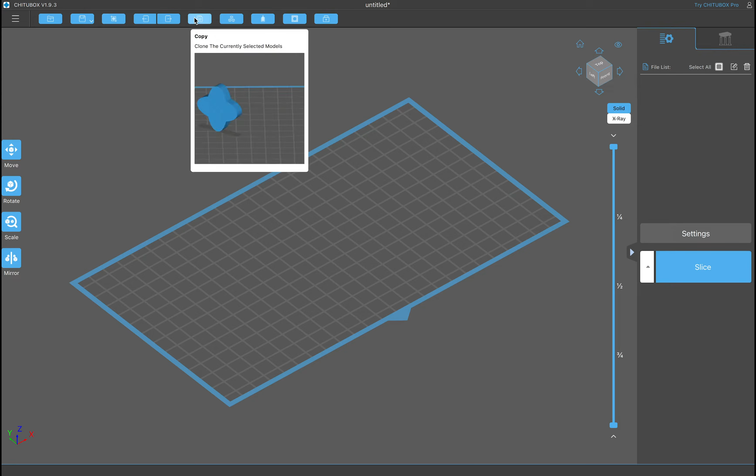Then you've got your back button and your redo button, and the rest are functionalities when you actually have some models in here. You've got copy, you've got auto layout, hollowing, and I have already done a video on hollowing, and I'll put that video right here for you. Then there is dig a hole, and that is also in that same video. And then repair.

Then on your left side, you've actually got your functionality tools for moving and altering your models. So you've got the move tool, you've got rotate, you've got scale, and you've got mirror, which is essentially a flip. The nice thing is, if you move your mouse over any icon in Chitubox and hold it, they have this nice little box that will pop up and show you exactly what it does.

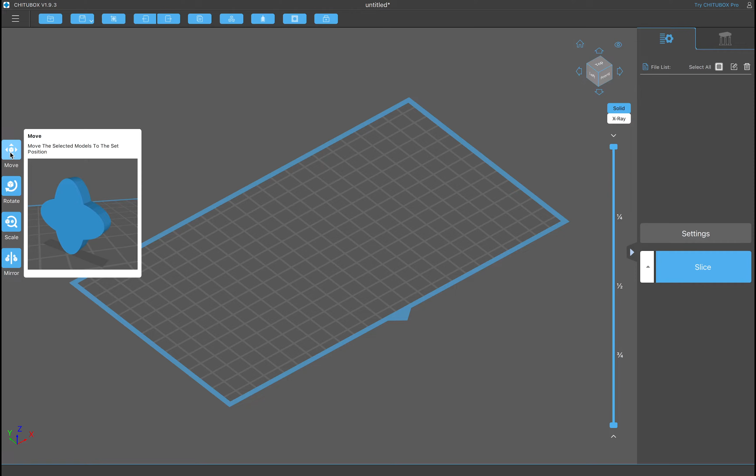So I'm going to go ahead and go to the open file and bring in my files. This is the actual model that I'm going to be using today from Chibi STL, and I'll go ahead and throw a link in the description of where you can get this model. The great thing is, if you actually sign up for Chibi STL, this is part of the welcome package, so you will automatically get it if you sign up for his Patreon.

So once you bring them in, it does this cool little animation drop for you. If you looked at the image of what this model is, it actually had measurements and it showed you how big this thing was. So I am not going to be printing this full size, and honestly, Chibi STL and 3DXM, which is the same artist, he always makes his models pretty massive, but I'm always scaling them down.

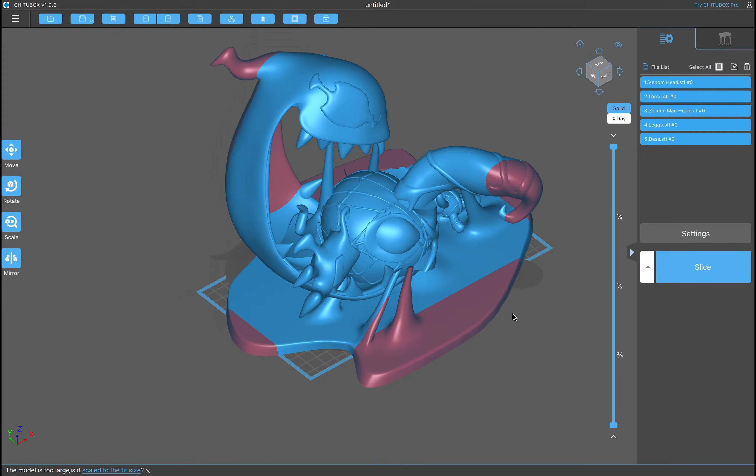But before we get into that, being able to move around in Chitubox is really important. So the main functions that you need to know to move around here is your scroll wheel on your mouse will actually zoom you in and out, and that is a very useful one. And if you have a laptop, that's just usually, at least for me on a Mac, it's 2 fingers in and out, sliding up and down.

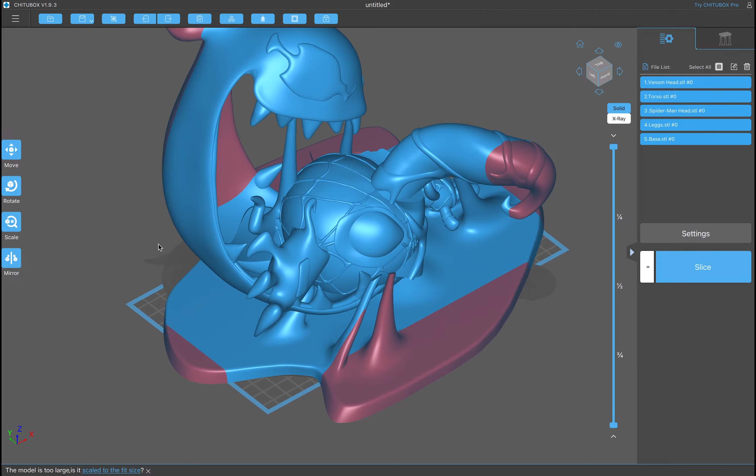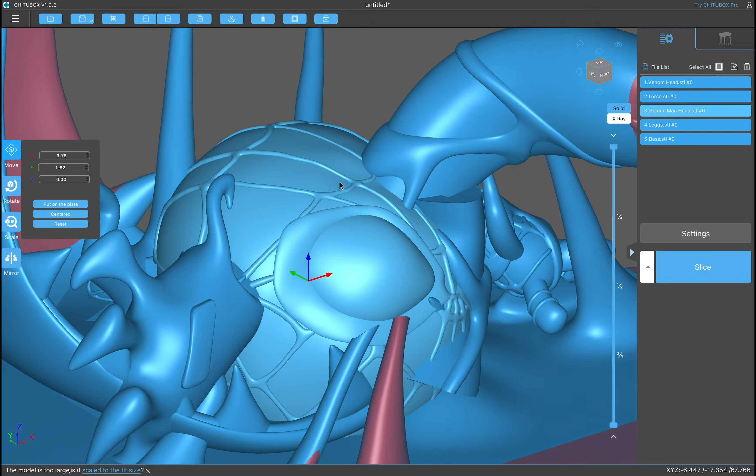Now, the other thing is your pan, and all you do is click with your left mouse click button, click and drag, and that will pan around so you can move around your object. The same thing if you're on a laptop, that's just a regular single click, and you can move that around. Now the other thing is your spin, so that is just a right click. I'm right clicking, holding that down and dragging around, and this allows me to spin my model around. So in the combination of zooming in, spinning around, and panning, those are the main things you need to know to be able to get around in Chitubox.

So the first thing I'm going to do is I am going to scale all of this. I'm going to see right here that everything is selected, hit scale, and then scale to fit. And that will automatically scale my entire model to fit my build plate.

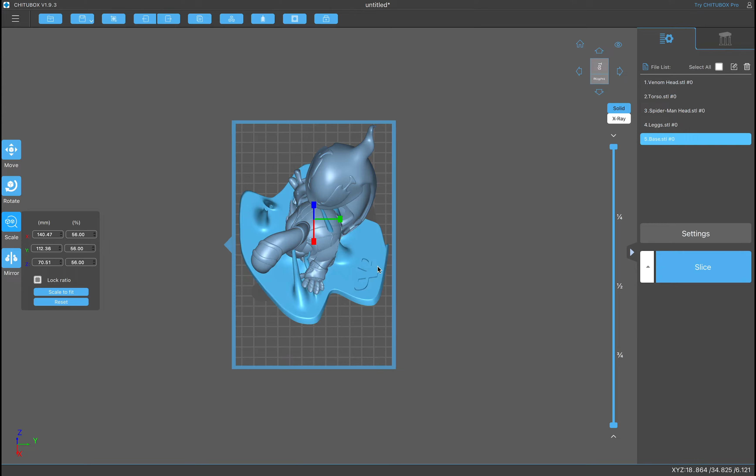So the one thing I do know, I am going to scale this down to 56%. So now everything is at 56 because I have lock ratio aspect and everything is selected over here where it says select all. Now I can uncheck this and only click one thing at a time and scale these one at a time, because when your models are unselected, they are gray. When they are selected, they are blue.

So now what I'm going to do is click right here on the auto layout, and this is just to easily separate everything so I'm not just clicking and dragging. Then I'm going to click on the center. And there we go. So now I have everything moved away from each other, and how I'm going to do this is actually going to be two separate prints.

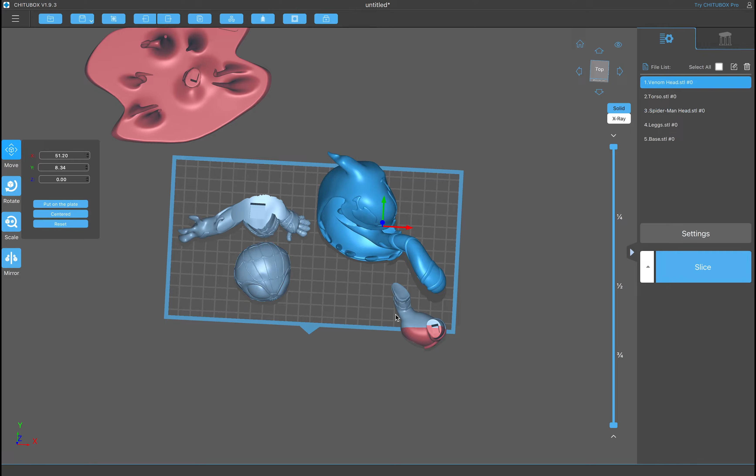I'm going to print the base in one print, and then I'm going to print Venom and Spider-Man in another print. So this will be one, and then this will be another.

The nice thing about Chitubox is when it is out of your area of printing, it will actually turn red. So if you see that this blue box, like if I did this right now, it would literally just print this right to the edge. And you don't want to do that.

You really just want to use the red to identify that something is out or if it's in. If just the tips of these fingers were red, I would know that I would have to bring this in. And I'm not painting his nails, it's just out of bounds, so it wouldn't print. So doing something like that would bring me right back into the printing boundaries, and this would print wonderfully.

So the next thing I need to do is hollow my models. I'm going to quickly go through this because I've already made the video explaining how I hollow my models.

So I'm going to click all of these and hollow them all at once. So I click on the top one, hold shift, and then click on the bottom one. Then I just go over here to hollow and start.

Then once that process is complete, I just double check, and I take my slider bar over here on the right hand side and drag that down to see if it actually hollowed.

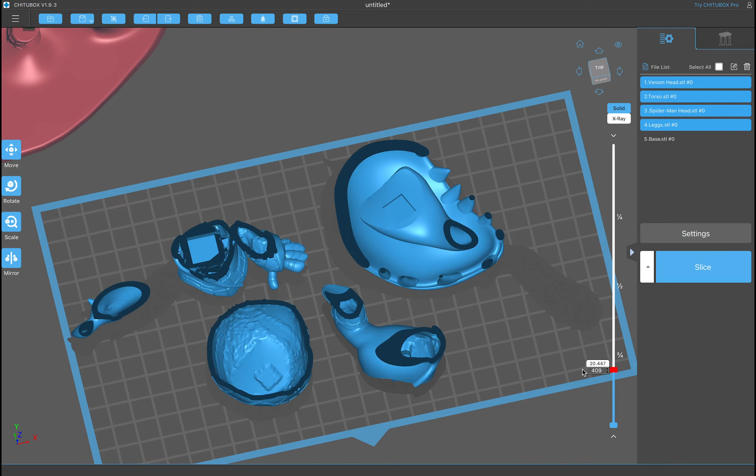So now I'm going to dig out my holes, and this is just to make sure that I get a good amount of drainage.

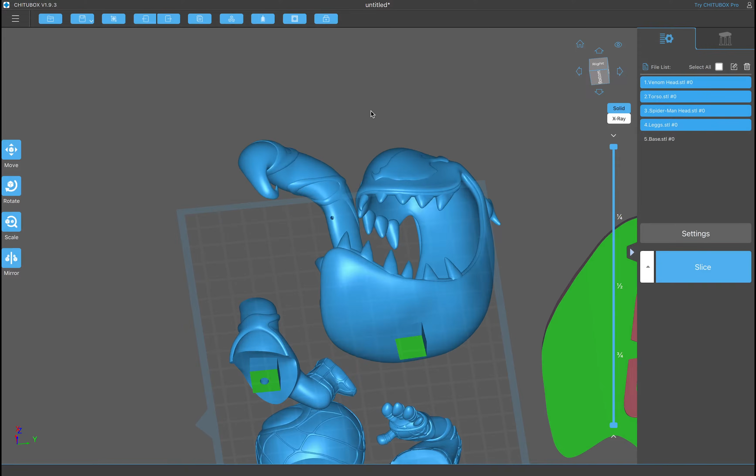So the other thing is for this tongue, I'm going to bring my size down, and I'm going to put it in some areas that are low visibility, and also places that will be easy to sand.

I think the other side, it'll be a lot easier if maybe I just put one here right in the side, and I can always putty that up and plug it up easily. And there we go. So now I have everything that needs to have a hole with a hole.

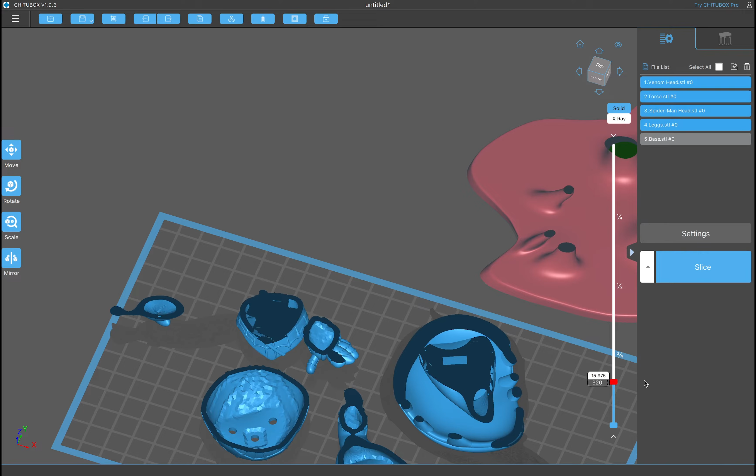That way we can clean out the insides of our model and we don't have any uncured resin on the inside of it. Once we get to this point, we are ready to start supporting our models.

Now, if you've noticed, we've been on this tab the entire time. So before we click on our support tab, we're going to click a model. So we're going to start with our legs.

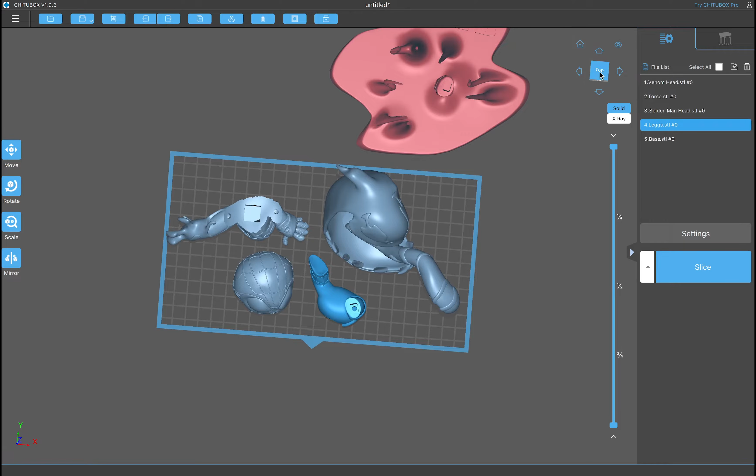And a couple things to note before you actually start jumping over to the support tab. You want to look at how it's positioned. And if we click on our top view right here, it will jump us directly to the top view.

Now you can click these arrows to jump to the different sides. So I can go to front, I can go to left, and you just keep doing that. And if you're on the top or bottom, the arrows will actually rotate it for you.

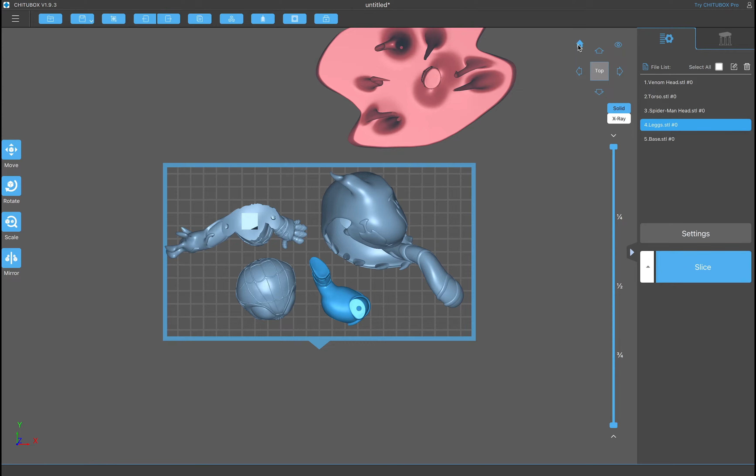So we're going to stay on the top. The other thing is if you actually lose your positioning or something like that, or maybe it's just way off, you can click your home button and that will bring you back to this view.

So let's go to our top, and then if you click this eyeball, this is actually perspective, and I recommend keeping perspective turned off because you can see how it looks like it actually passes your build plate when you're looking at it from the top.

But when you click this, this is without perspective, and you can see that it is fitting within your build plate.

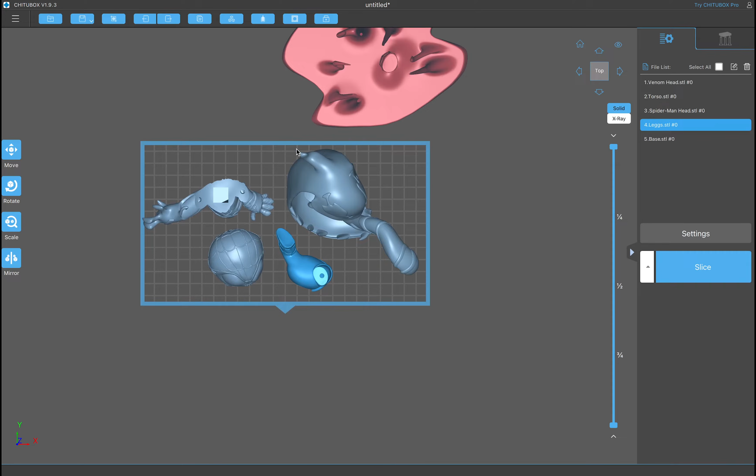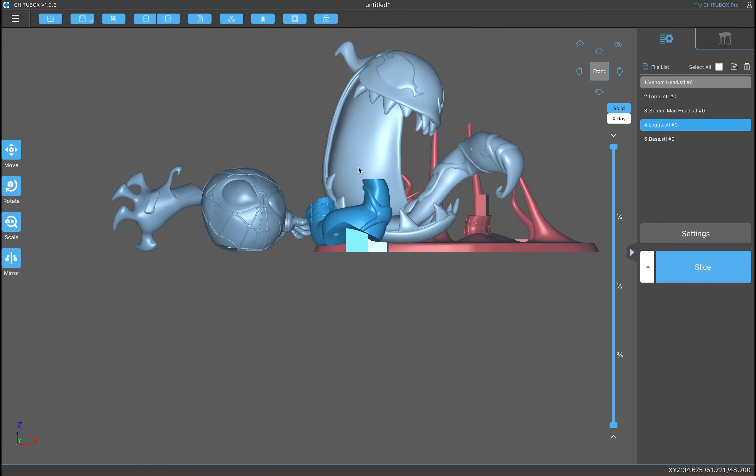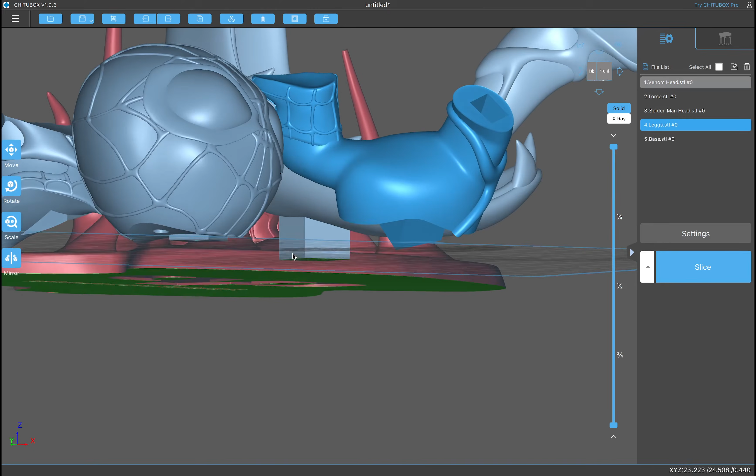So now to come to the legs, we're going to go to our front view, and we don't want this to just be flat. We want to angle it. So I'm going to click on my rotate tool and rotate this, because we don't want any flat edges, or we'd have to put a ton of supports here. We want it angled. I've angled this, but I'm going to angle it even more because I'm looking at this knee—I want it pointing up, not a flat surface. It has a bit of a round, but I want more of a round, so I'll angle it up to where that leg has a nice slope.

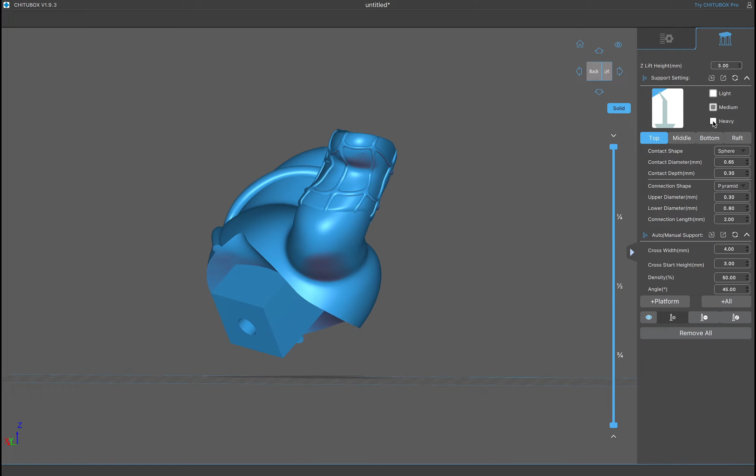So that's kind of how I'm going to do him. Here he is. When you jump over to your support tab, you can see it automatically lifts it off the build plate for me to add supports—that's your Z lift height. I go between 3 and 5. You don't want it super close, so 3 is usually the minimum I go. Then you can change between medium or heavy supports.

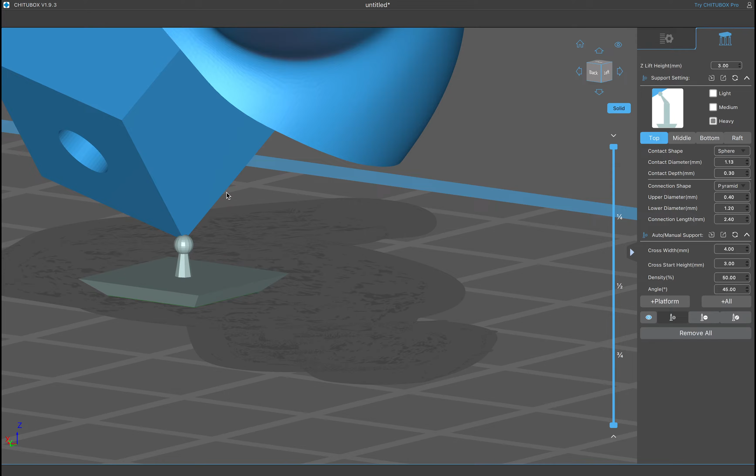So when it comes to my first supports, I always go with heavy. I'm going to click heavy, then click right on the bottom corner so it prints right on the corner. I'm not worried about the edges because this is a connection point and I'm just going to sand that down. So I'll go ahead and put a couple heavies on each edge—one here, one here, same thing here and here, move over, here, here, and one over on this corner because it has an overhang.

So now I have this very well supported, and the reason I use heavies first is because I want a really strong connection here, since this is going to hold the majority of the weight of your model—remember, this is hanging upside down. So I want a very strong connection when it first starts.

And the other part is when there's islands. What an island is—let's bring this down and I'll show you. An island is when it's printing out in the middle of nowhere with nothing attached to it. So you can see right here, these have two islands right here—one here and one here.

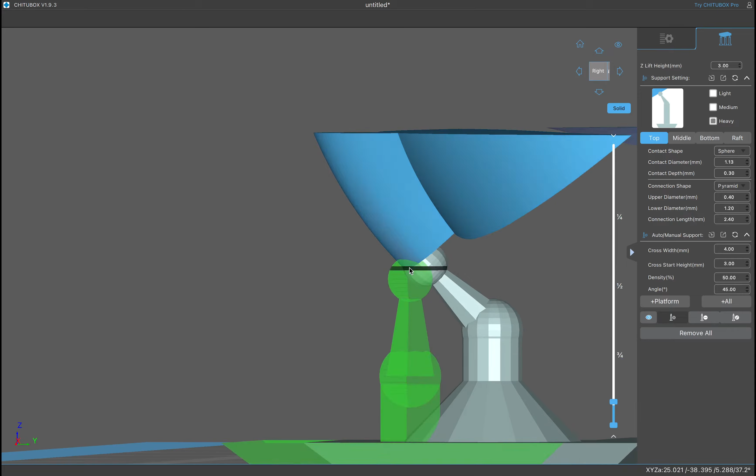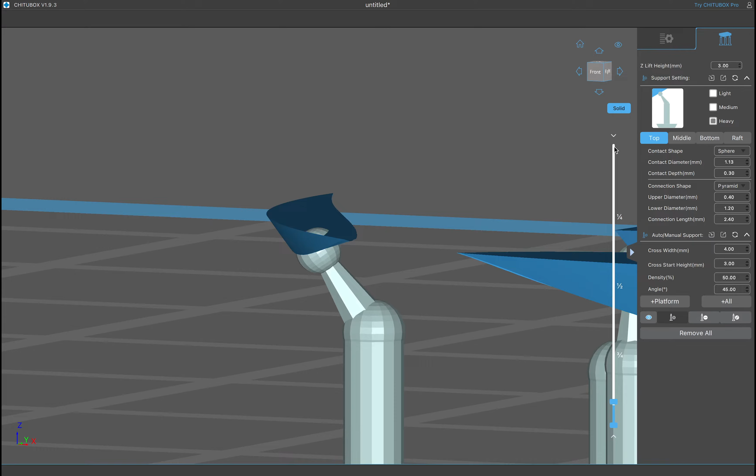So I'm going to support it at a heavy right at the bottom of this, and I'm going to try to do it so it's not interacting too much with the model. That way I can take it off and sand it off really easily. And then the same thing with this piece over here. The way you can check it is you just bring it down.

What you want is your support touching the actual model in the very first few layers, and you can see it's connected really well. Moving up, it's just going to get more and more. Now with something like this, I'm going to switch to some lights, go underneath it, and do the same thing along the edge. Then I'll move over and do the same thing on this one.

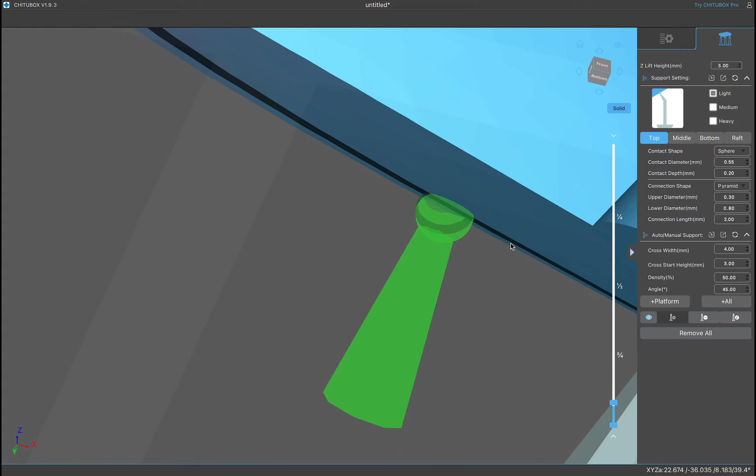Now you might be wondering why I'm not putting supports right here. It's because the more supports you put on the outside of your model, the more sanding and cleanup you're going to have to do. So doing this minimizes the cleanup and ensures a nicer, cleaner print.

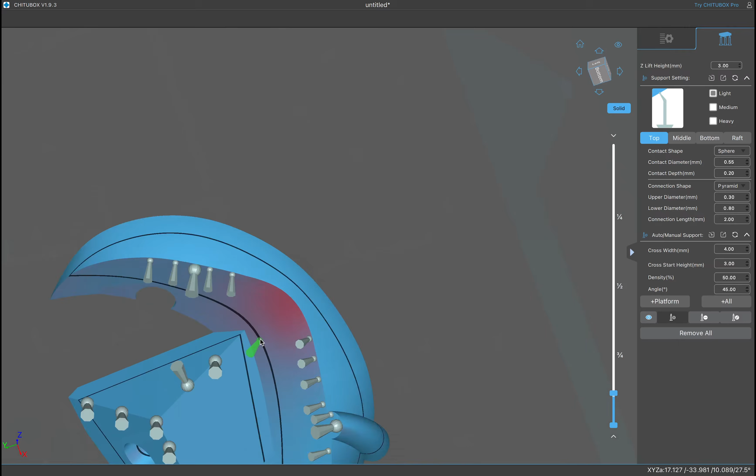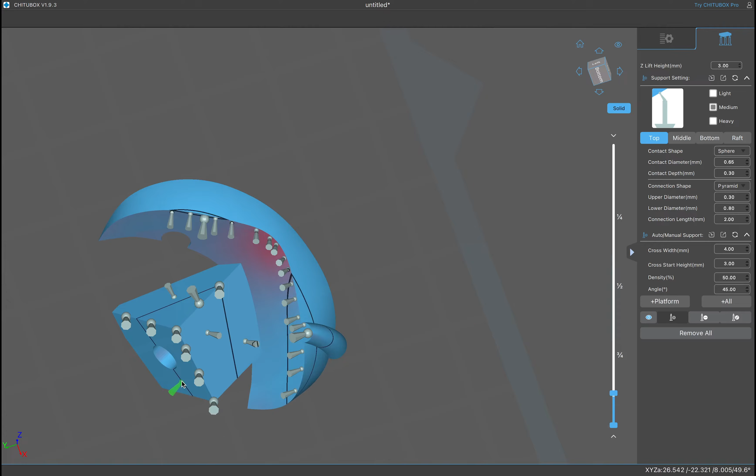So then I just move this back up, and I'm also going to keep doing this along the edge and right where these contacts are, because it's going to be very thin when it starts to connect. Then I'm going to take some mediums just to give a little bit of an overkill. I'm going to put just a couple on the faces of this model.

I'm going to put a couple on the faces right where the pegs are. Then all I'm going to do is keep sliding up to see if I see any more islands. And there are no more islands on this model, which is a great thing. But you can see the red is denoting your overhang, to where it probably needs some type of supports.

So this is when I switch over to my lights, and I'm just going to put a couple right here to help with this overhang. Then I'm going to move over here and do the same thing. I'm just going to put one here, and I'll put one right here. So there you go.

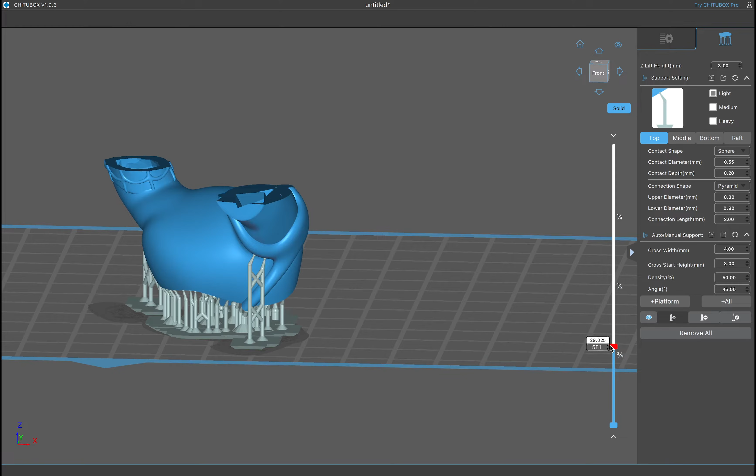So then I'm going to just keep going up, and everything should be fine with that. Now right here, there's a little bit, so I'm going to put just one right here and one right here. Now the one thing is once these start to get taller, I never do just one. Because if I did this, I've got this one pillar going all the way up. It could be wobbly, go back and forth, so you have to make sure all of your supports are nice and strong.

So you could, if you just want one support right here, you could just click on a support and support your actual supports. So actually this would be perfectly fine too. So I'm going to go ahead and just leave it like that.

Now this one is all the way done, so when I'm done with that, I just click back over here to my settings, and it will bring me to all of my models. Now an important thing to note, once it's supported, you can still move this around and move it on your build plate. You can even rotate it to make it fit good. So if you're arranging a lot of models at once, you can spin them around.

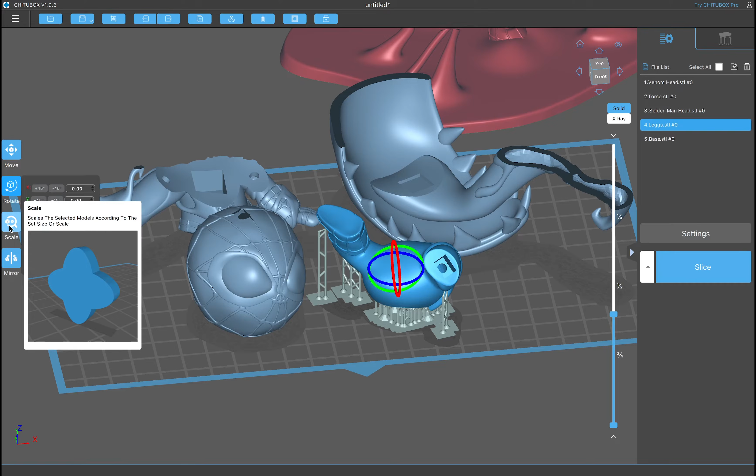But the one thing you can't do is scale it, because it will say this: it's going to delete your supports. So do you want to delete your supports and scale it, or do you not want to? So I do not want to. Make sure that you have all of your scaling right and your positioning with the rotation in the proper way before you support, because you will lose all of your supports.

So now I'm just going to go ahead and start to go through this, and if there's anything to note, I'll stop and explain it, but let's just speed through this and I'm going to support everything.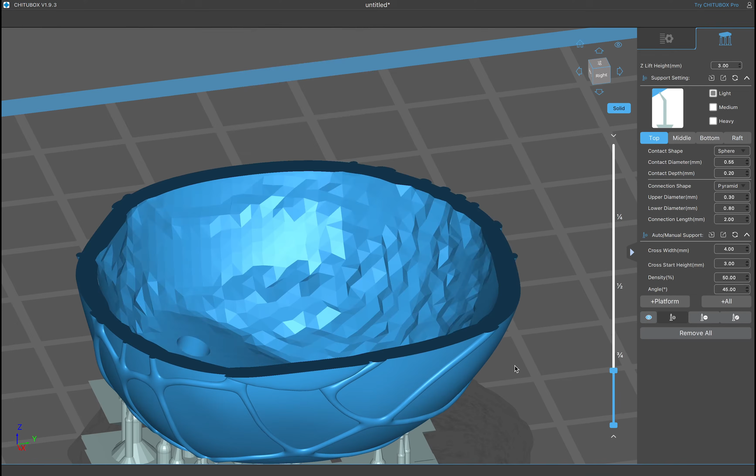So I have the head done. Now I'm going to do the torso. First I'm going to move this away just so I can see it a lot better. And you got to just kind of look at your model and see what is the best way to position this. So I am going to probably move this up like this.

That way it's printing up and everything is up at an angle, especially with these fingers. I'm going to have to support this and this little thing right here, but all of the fingers should be able to go without supports. So you can see how the tip of this finger right here is going to need it.

But I can always rotate it as well a little more. Bring that up. So no matter what I do, I'm going to have to do that. So I'm going to not make it as harsh now, because I know I have to support it, so at least I don't have to support these two fingers.

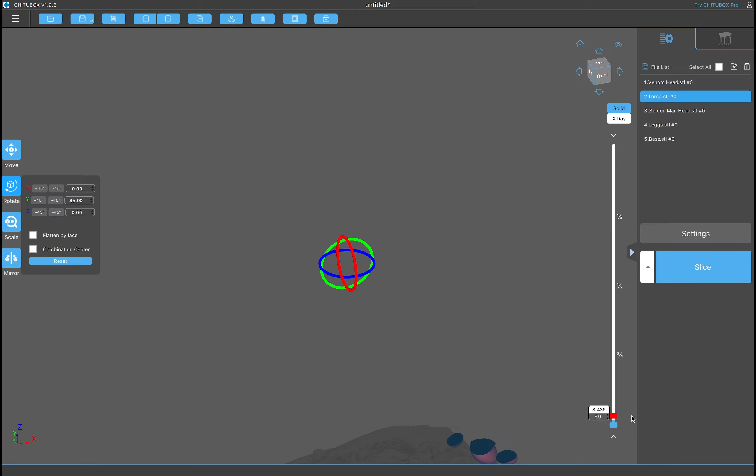And those two print just fine. So then bringing it back down through, I know I'm going to have to support every finger and thumb, and that is perfectly fine because they're nice and smooth and I'll be able to sand these really well.

So now all I'm going to do is move this back over here and jump to my supports and get started on that. And it's the exact same process.

I'm going to go in here and get my heavy supports and put one right at the tip of each finger. Then I'm going to take my light supports and work on any of these small little islands. So you can see here in the hand, there are a couple little islands here that I'm going to have to support.

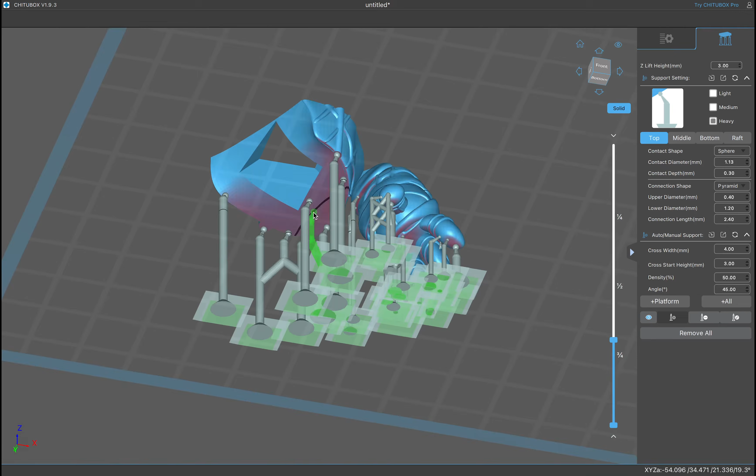The arm right here where it actually comes all the way out before it connects, it's going to need some type of support because that comes out way too far. So what I'm going to do is take some mediums and put it right out here where it has the most stress on the model, and just put a couple of them right here. Then I'm going to go into my lights and just kind of keep supporting that along the way so it's a nice strong structure.

But the thing I'm doing is making sure that they're connected. So you can see this connection bridge right here. I want them close enough to where it's going to be a really nice strong support. That way this is going to give it enough structure to keep that weight when it's pulling off of the FEP.

Another thing here, if you see the fingertip right here, it doesn't make a very big piece before it connects, and then it's actually a part of the whole hand. So there are times where I am not going to use a heavy because it's not necessary, because I don't need to hold a lot of weight. So what I'll do is use a medium support, click it right at the tip here, and then just put a light right here.

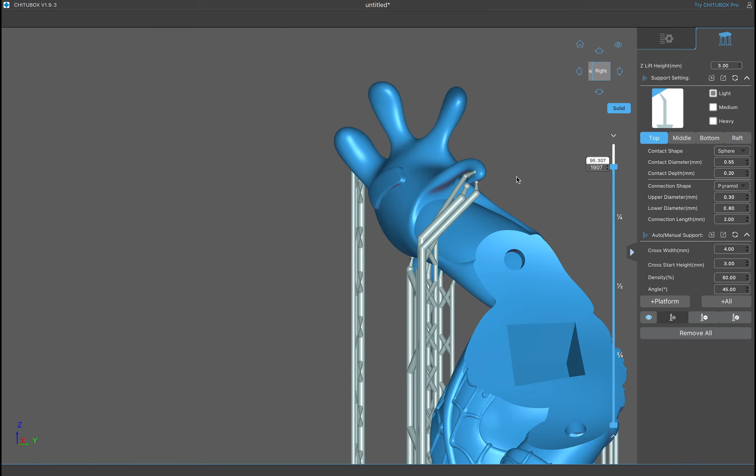And there we go. Now we have the torso fully supported. So the last thing we have is the Venom head. First, I'll kind of look at it, make sure I got the right angle. I don't want this to be sitting flat, so what I'm going to do

is click the rotate button, and then I'm going to rotate it back a little bit, and then to the side, to the back right there. That way it's just on the point, so you can see how it would be printing.

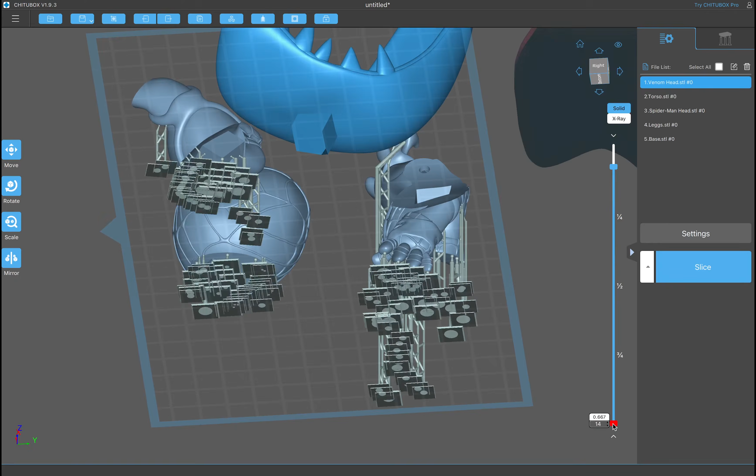And just by checking my model like that, I could see that this actually needs a hole right here. And there we go. So just like all the rest, I'm going to go ahead and support it. But you can see that these teeth are going to be a challenge. So I'm going to go ahead, ignore that for right now, and come all the way to the bottom and just focus on one little bit at a time.

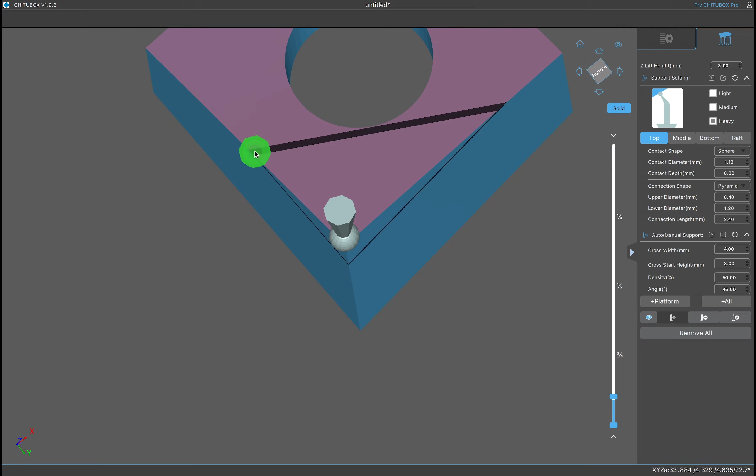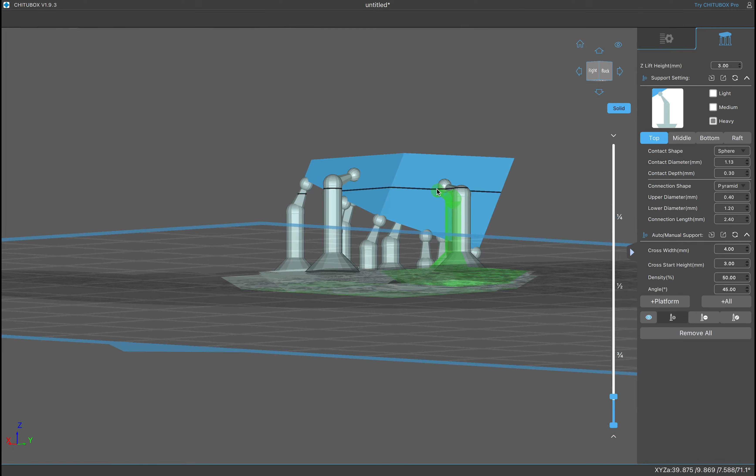So I'm going to add a heavy around the edges. And this is a big area, so I want to make sure I have enough of a connection and it's strong enough to hold this big surface area.

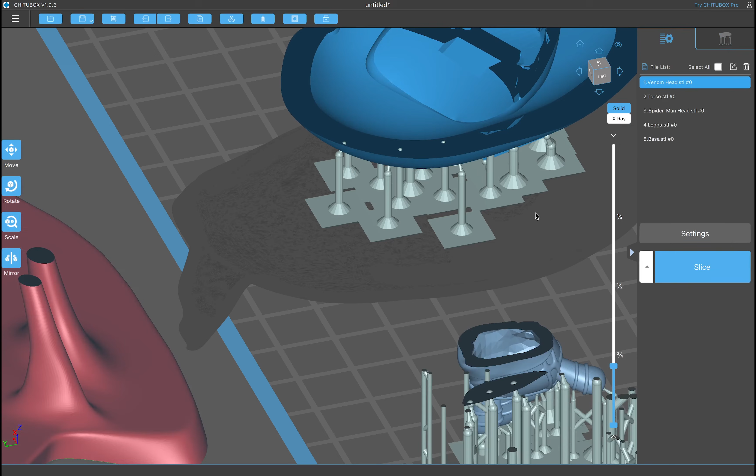So this is one thing that I do to prevent layer lines at the very bottom of my models. Now, what I first have to do is really look at the amount. So let's switch over to support and show you.

So this is a large surface area, so it is going to be having a lot of suction, because you can see here that it's actually printing all of this. So this is going to have a lot of suction when it pulls off, and that is where you can have the actual risk of getting lines in your model or even breaking supports.

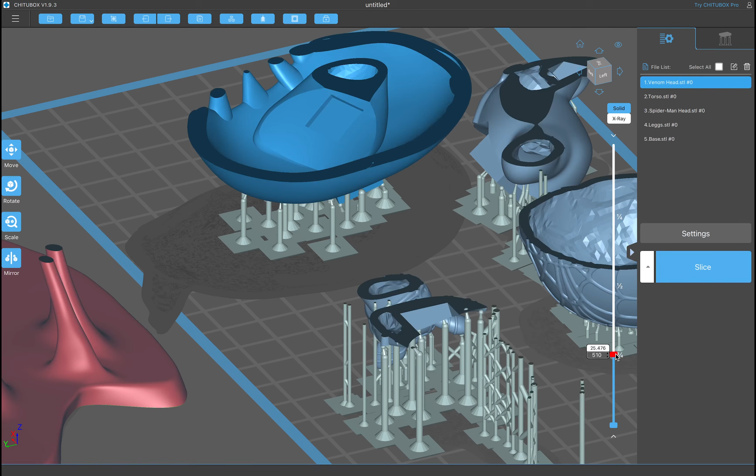So what I'm going to go ahead and do is actually just add a hole straight through my model. Now I can also be a little smart about this, because I know that there are certain areas that Spider-Man is going to be covering. So his head is going to be setting right here.

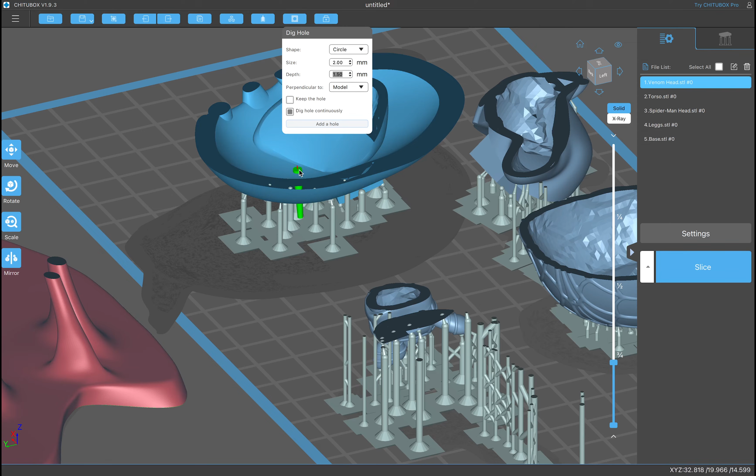So I'm going to go ahead and add a smaller hole, not that big, straight through the model. And I might have to make my depth a lot more. So there we go, now I got a hole right there, and that will actually relieve a lot of that surface tension.

But now I'm going to go ahead with some lights and just come through and add sporadically, and this is just to help with the supports.

And then out here I'm going to add just a couple heavies, because I just want this thing to not move whatsoever. And this is something you pick up over time, how much you should really be adding, because sometimes you can get away with just a little bit.

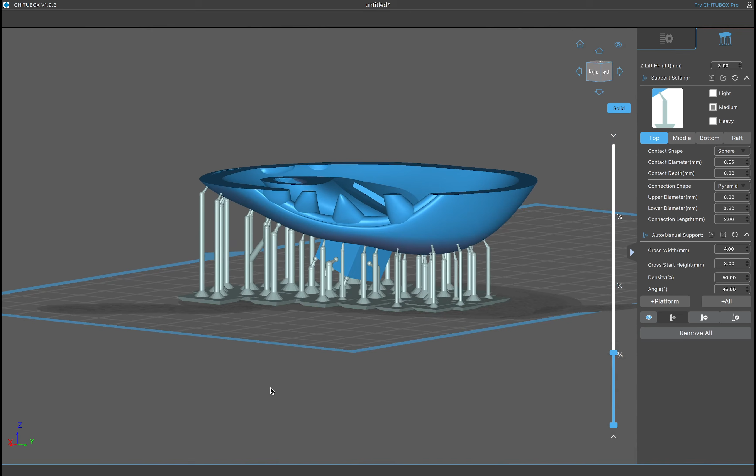And this might seem like a lot, but it's still a pretty light amount of supports for this model. But we're using a combination of heavy supports, medium supports, and light supports.

So now everything is good until I start getting to the curve of the tongue, and I'm going to go ahead and just put a heavy support right there, and then light support surrounding it.

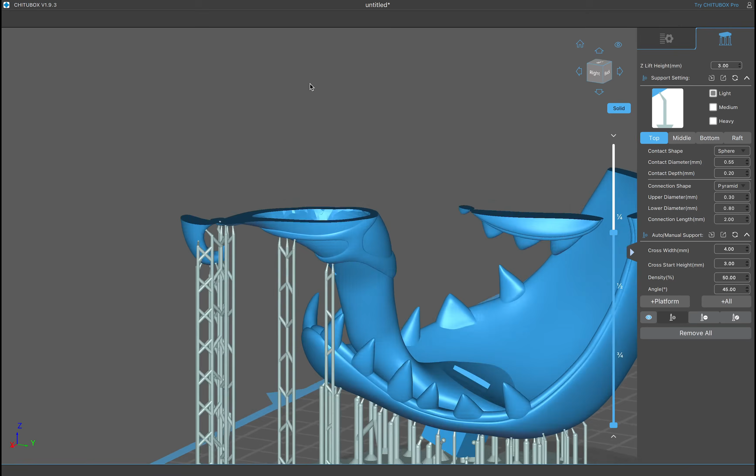Okay, so now the tongue is all done. Now it's time to move on to these teeth. And I'm not going to mess around, I am just going to put a heavy support at each one. But this is the thing, I'm going to actually bring this up just so I'm only going to be seeing these teeth.

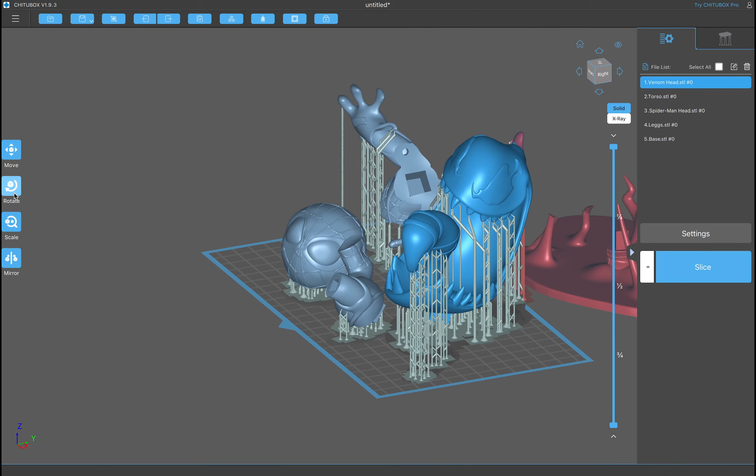Okay, so now we have Venom all supported. Jumping back, I'm going to go to the top view, and I'm going to see here that he is actually off the build plate. I'm going to just move him around.

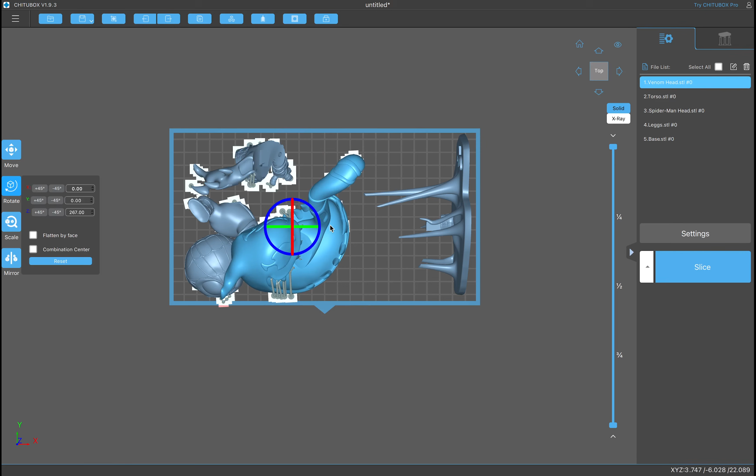And now I'm wondering if I can actually fit everything on the build plate. I'd have to print this at a pretty harsh angle, but I could support it enough.

Alright, so I am going to attempt to print all of this on one build plate. So I'm going to go ahead and start slicing this guy. Now, when it comes to the angles going up this way, I'm not too concerned. It's really anything coming down, that's where I'm going to have my islands.

So first I'm going to go ahead and support this like crazy, because this is going to be heavy. So I am going to just keep supporting this.

So now I have everything actually supported, and all I'm going to do is hit the slice button, and it says I'm exceeding the build plate, and it's this spot right here. Let's see if that does it.

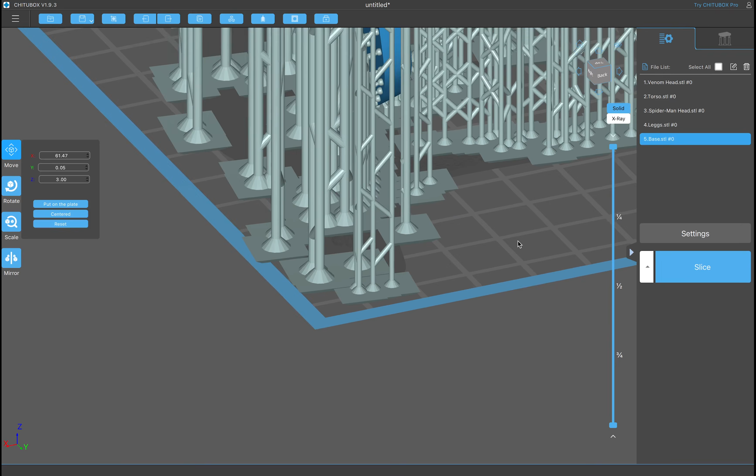But now I gotta make sure I'm not hitting Venom right here. It's close. And this time I hit the slice button and everything is on the build plate.

Okay, so once you slice it, you can actually see your 3D models all supported. And then on the right is actually your export screen. So this is your preview of what your prints will look like layer by layer.

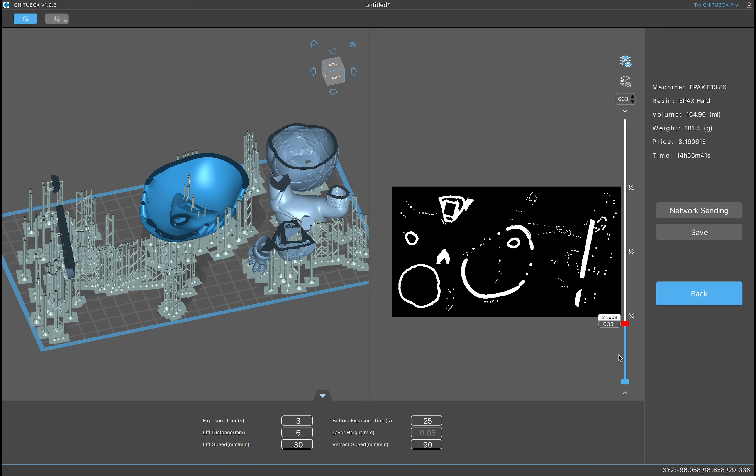I honestly hardly really look at these. I usually scrub through them to make sure I don't see any craziness going through it. But for the most part, you can see on this side, this is actually what it's going to be looking like layer by layer. And this is the single layer view of what it is actually printing for this specific layer.

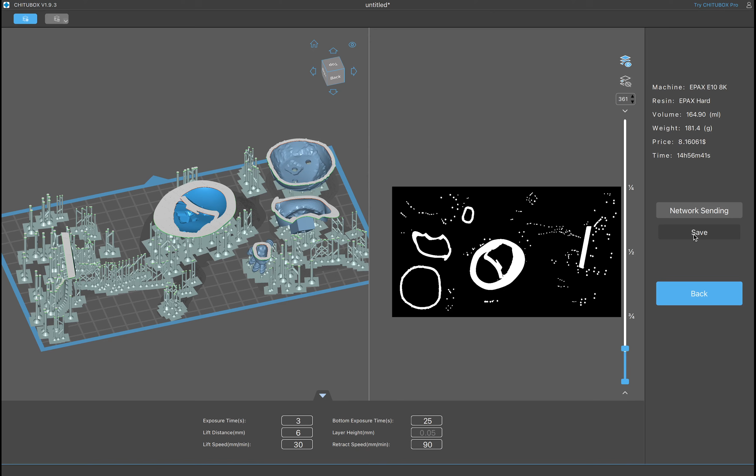So now I'm just going to go ahead and hit save to my USB drive, and then it's going to go through the process of actually writing it to the USB drive, and from there it is ready to go to the 3D printer.

So now you have the basic foundations to support your models properly and print them without failures, hopefully. Now it's time for part 3 of this series.